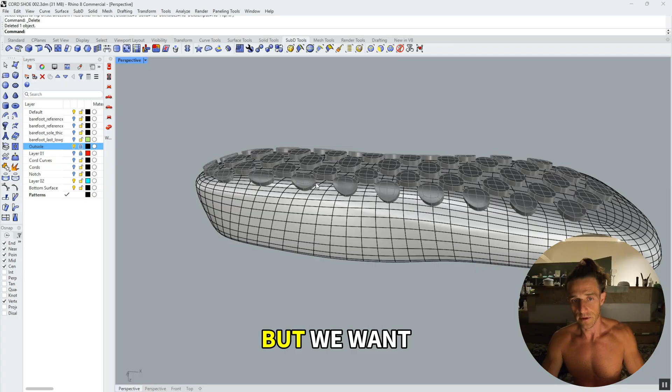Okay, as you see, the edges are very sharp, and that's what we don't want, but we want the edges on the inside to be sharp.

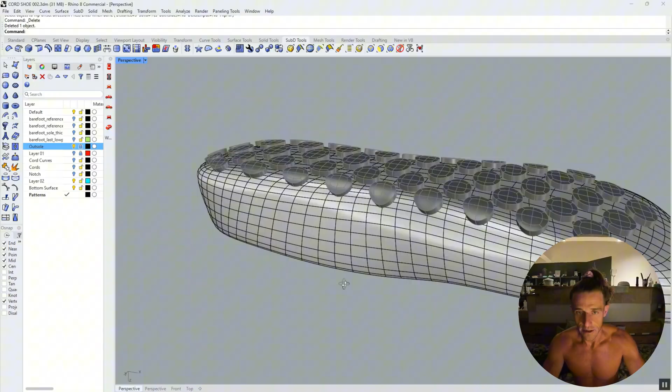Now, another thing to keep in mind is if you do it this way, you create undercuts, which doesn't matter for this, but if this shoe was injection molded, that would be a problem. You want to always keep options for injection molding, because if your shoe blows up, you might want to injection mold it down the road, since it's so much cheaper and the profit margin is higher, and you've already made sales to have money to open tooling from 3D printing. Sometimes injection molding makes more sense, but if that's going to cause child labor, or you have to go check the factory, then forget about injection molding—we don't want that to happen.

Okay, so these guys, let's see—if we hold this down and move up like that, control down, then this is going like this. So how high did I move it up? Don't really know, because it's all visual, but I can tell what's going to be good from experience. So I'm just moving this, holding down control.

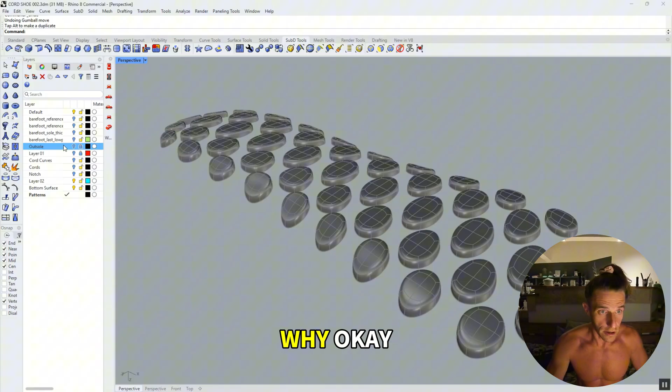Okay, so let's see. Now these ones are open from this side, but that doesn't matter to us right now, I'll show you why. But first we want to make sure they all intersect, so we're going to move them into the geometry so they definitely all intersect. You see how they're all going in like that? Okay, so that's what we want. Let me do a save here at this point.

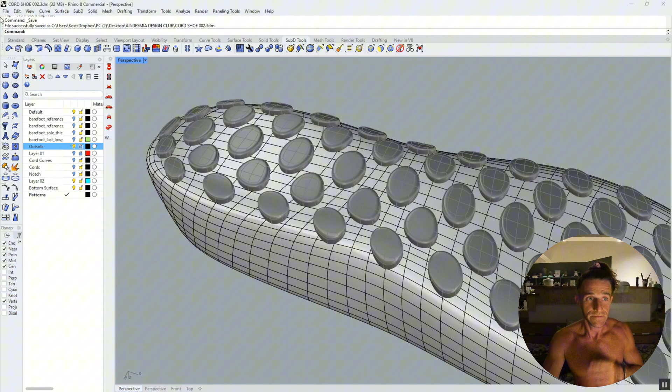So now we have this outsole like this. Let's do a render view so we can see what's going on. So this is what it looks like right now—okay, that's pretty good.

So, in order for this to be ready to go, printable and all that stuff—now, I saved it here, let me save an incremental, so I have this and another file. You start making a million layers here.

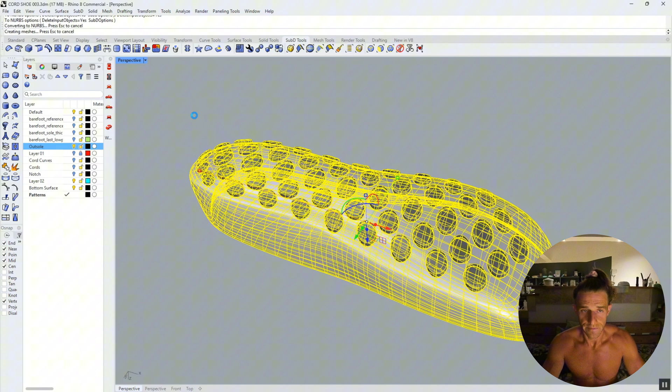Okay, so let's make this one piece. So I'm gonna select this—select this actually—and convert all of this to NURBS. Okay, now it's all NURBS. Look at that disgusting cut—doesn't matter. Now that it's all NURBS, you can select the whole thing and say Boolean union.

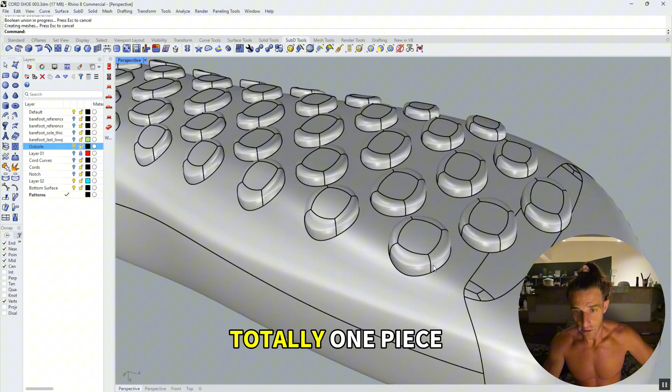It's going to be one piece. Okay, now it's totally one piece, see? And then you can check—it's called show edges—make sure there's no naked edges. No naked edges, no non-manifold. This is going to be printed, no problem.

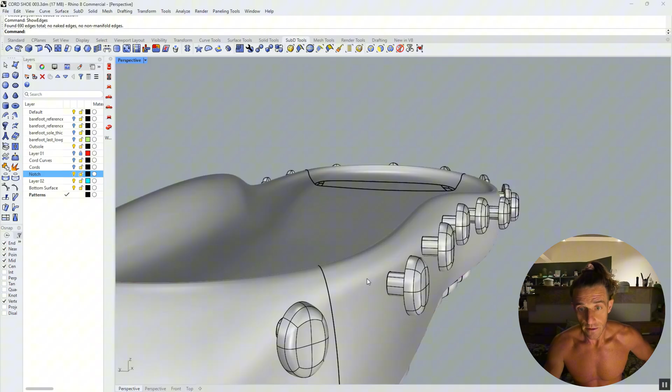Alright, and then we have our notches. And our notches now are not going in all of them all the way.

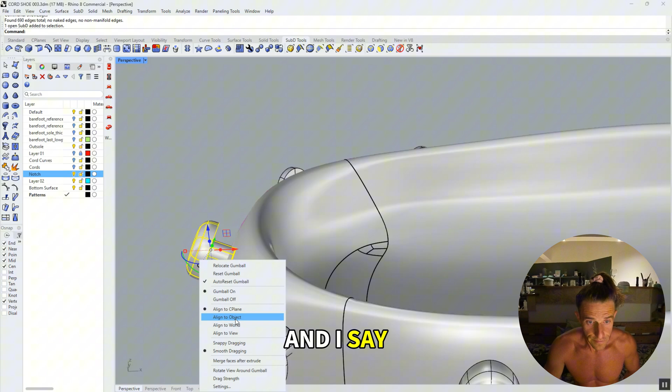So we want to make sure that these guys... let's see if I click this white one and say align to object. See, this is supposed to align to object, but I don't know why it doesn't align. But you know me by now, I don't dilly-dally too long trying to figure out why things don't work.

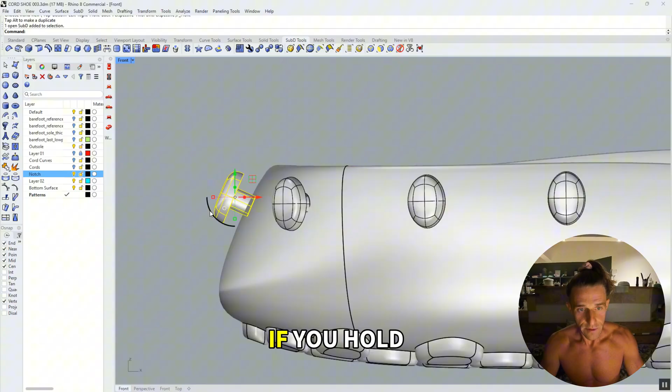I just do the next best thing. So you hold shift - oh yeah, you hold shift, that's right. If you hold shift, the Gumball moves like that. So all I did is align the Gumball. Actually, I did push this one in, so this is fine.

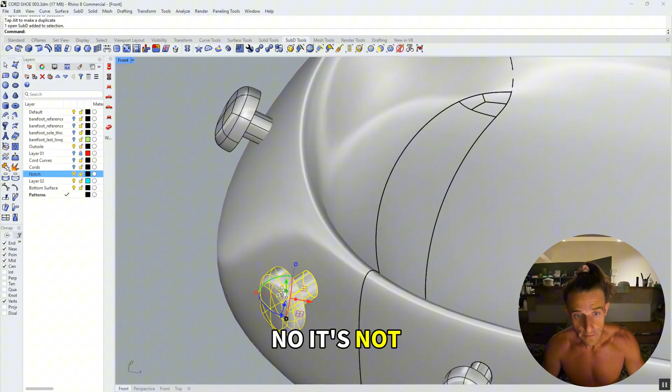And these other ones, so this guy, let me see. That's pretty much aligned in this direction, but it's not aligned in this direction. So is it? No, it's not. Okay, so first of all, I'm going to view this from the top. Okay, so you see how this is not aligned? Like what I mean?

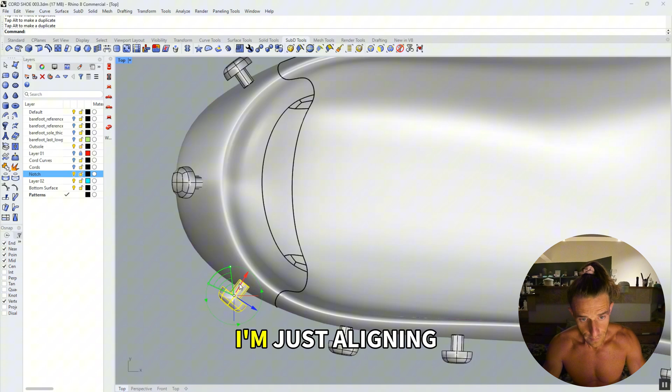Stop it. Okay. I'm just aligning this in there, and it's still annoying that the object is also moving.

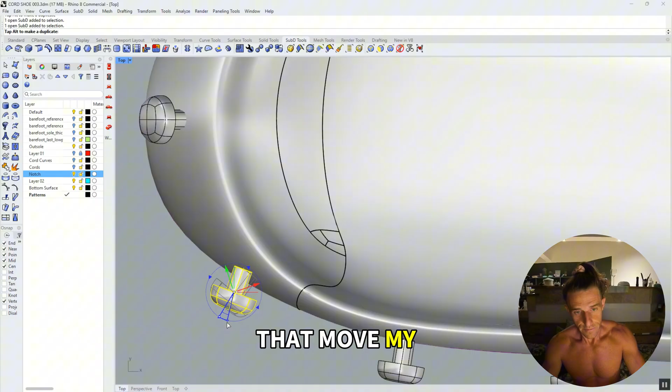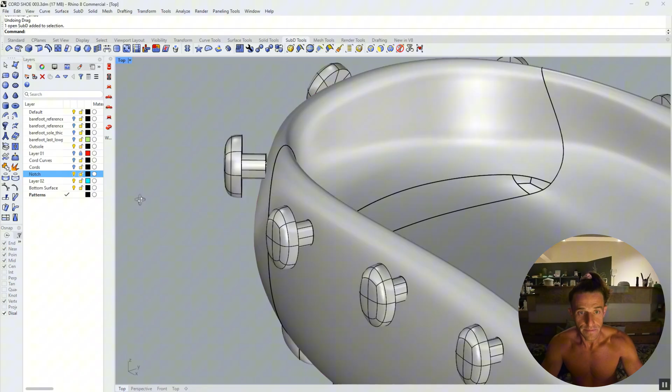Just trying to move this. Alright, let me undo, or let me make sure that it doesn't snap to anything, because that's - or you know what? My only problem here is that this

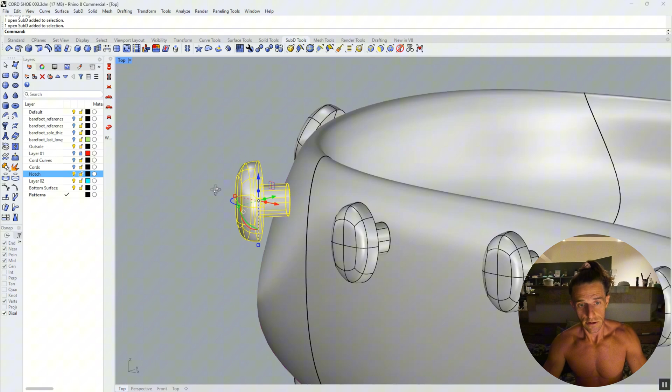is not aligning to the surface really nicely. So I want to make sure that it aligns okay to the surface. Most of them are already, so it's just one, or it's just these two. So let's just manually fix these two.

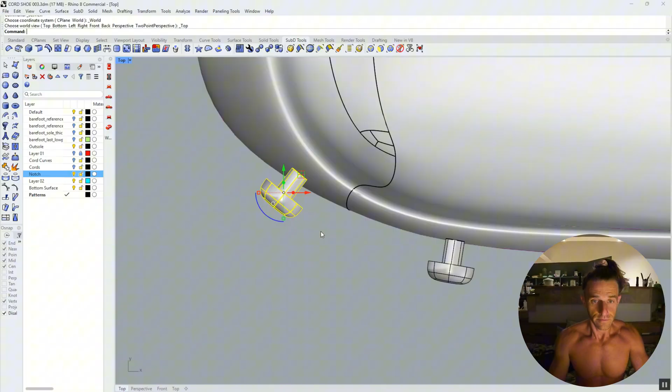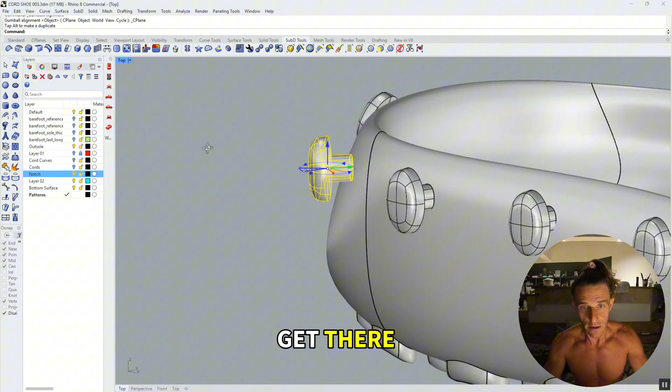So back to top view. I'm holding control. Okay. It's so annoying, let me see this. Let me just CPlane. Okay, now that we get there, it just doesn't stay there.

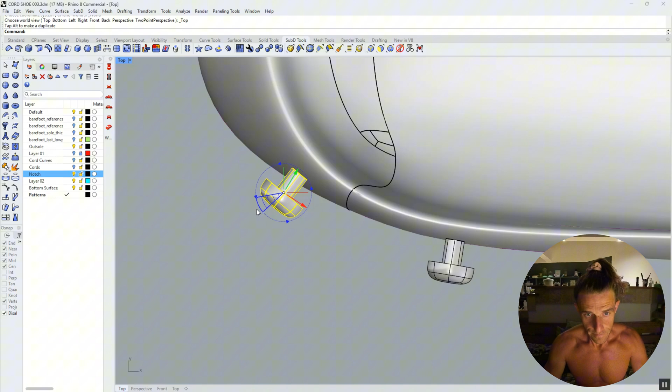Align to view. Okay, top. Okay, well first let's do one thing at a time. Stop it. Align to view, and then - oh wow, this is not working right now. What's the point of Gumball?

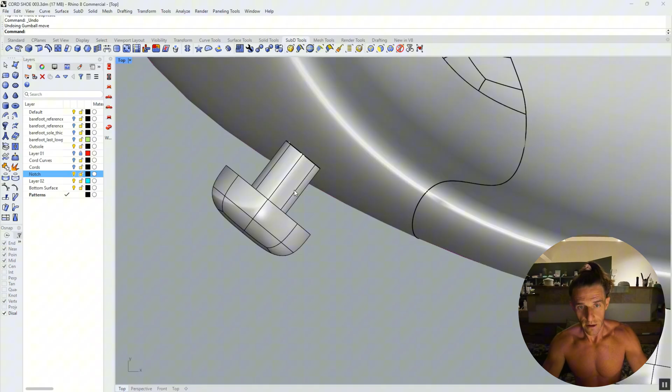Okay, let's just do it visually. Move. All we're trying to do is go in here. Okay. And then make sure this guy is going in there. Okay.

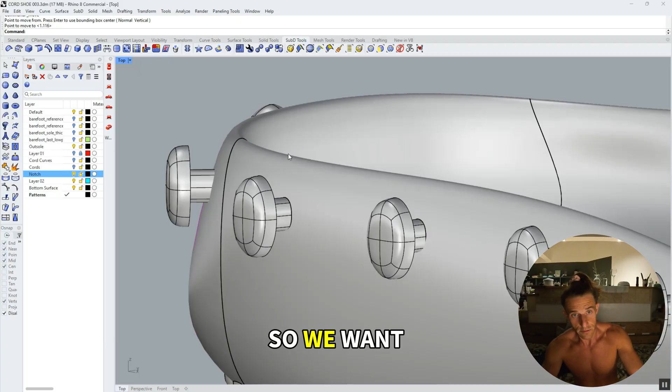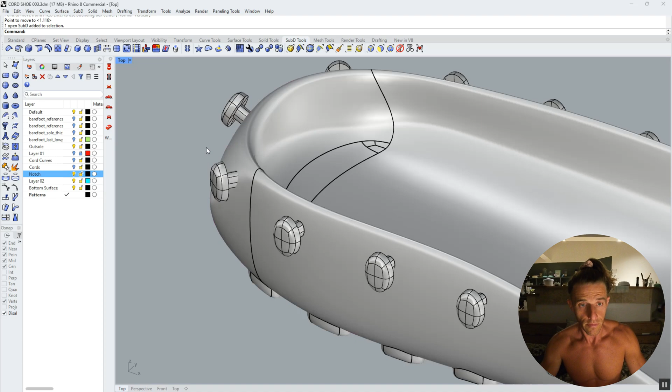But you see how this is very open here, so we want to rotate in like that. But that Gumball isn't aligning nicely, so we can go in there. But we did align to view, so we can move this so it's like really good, like this.

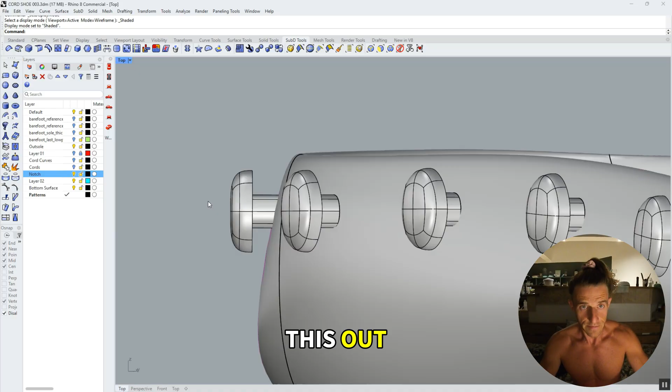And then, oh, we can check this out. Let's go to an ortho. We are in an orthographic actually. Okay, so we are in an orthographic view. So because it's aligned to view, I'm going to type rotate.

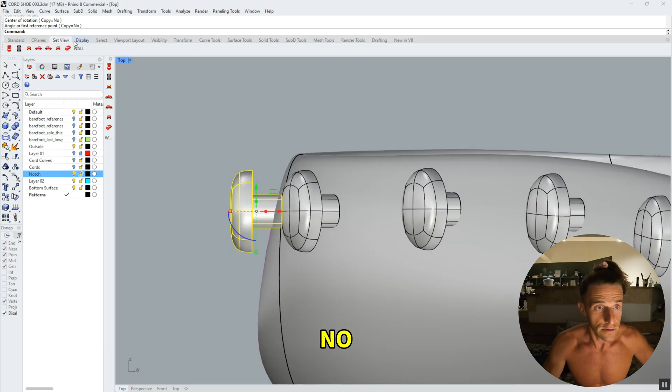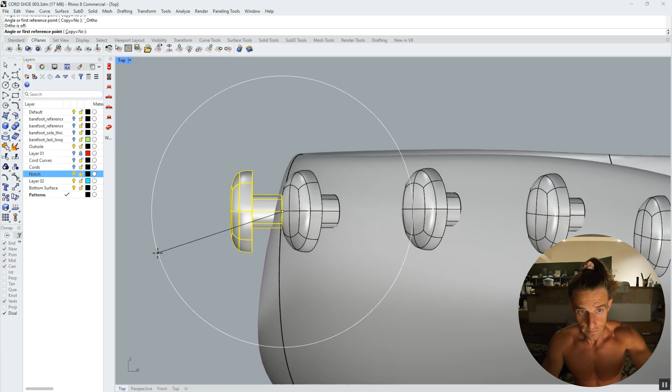Okay, see that? That's what I'm talking about. I want this to align to the surface. And then we have one more problematic - this one here. So we want to make sure that's nice to view. Okay, it's good enough.

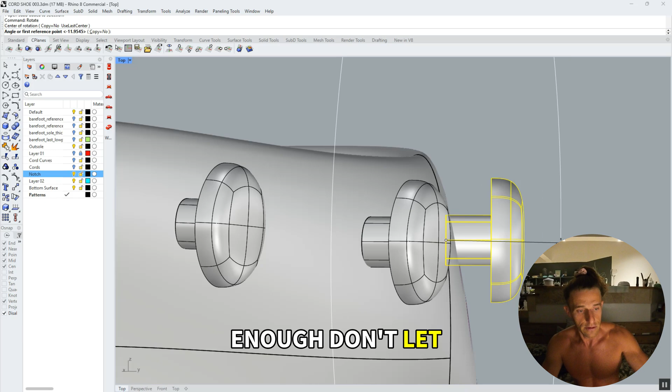As one guy used to tell me, don't let perfection get in the way of good enough. Yeah, like things don't have to be ultra perfect because it's too small to matter. Okay.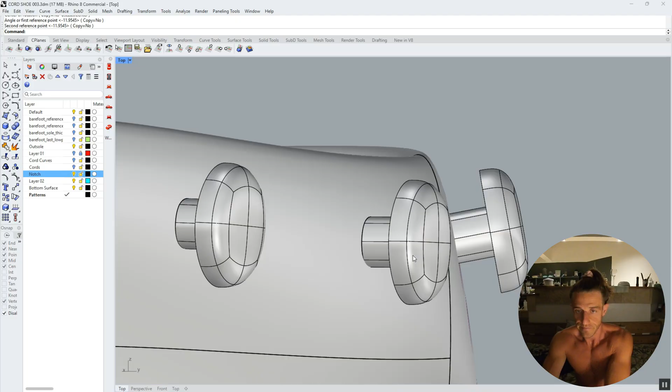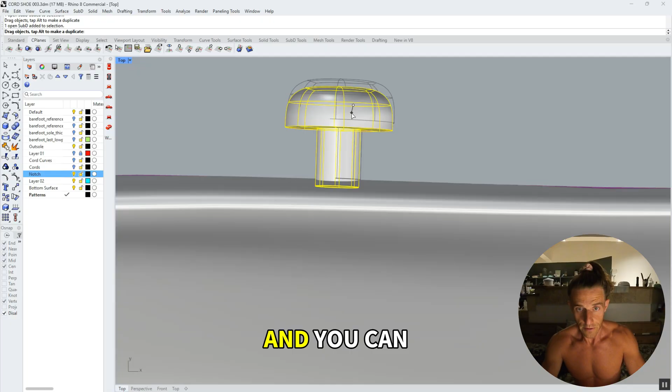So that's going in. Okay. Now we go to top view and we move everything in a little bit. And you can see where it was, so from where it was to where you want to go. So yeah, you move it a little smidge in one direction, doesn't matter.

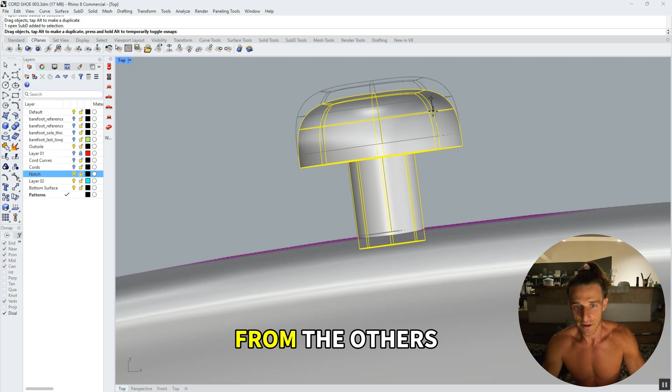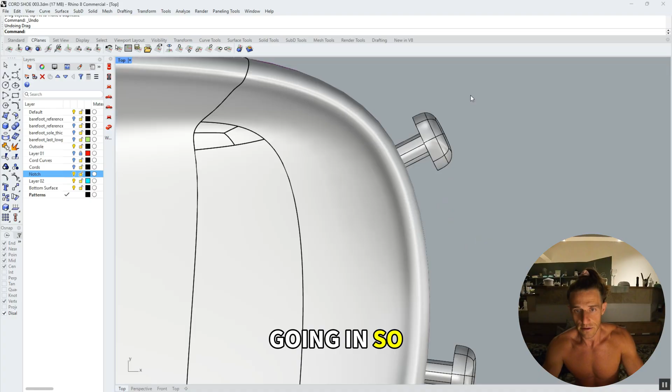Again, if some of these are, you know, one-tenth of a millimeter different from the others in and out, nobody cares, okay, it doesn't matter. Now this would never be injection molded because it makes too many undercuts, so we have to figure something else out. This is already going in, so that's okay. This is already going in as well. This guy's not going in, so let's just go in a little more.

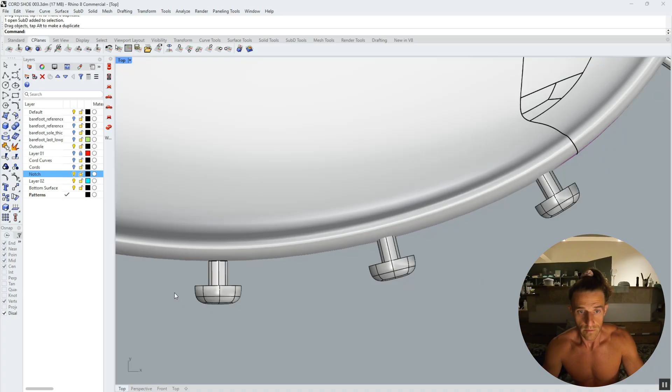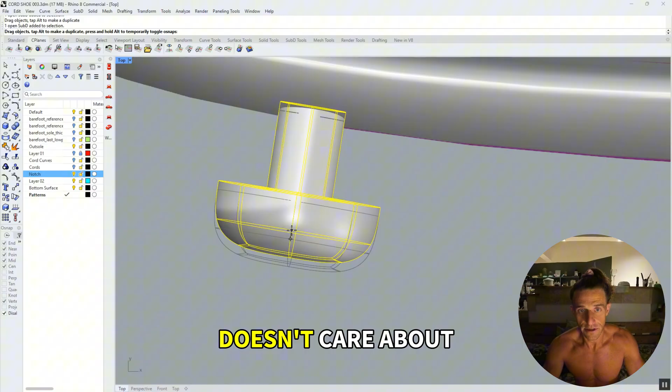Can you make all of this perfect and mathematical? Yes, you can. But would that take hours and hours of trial and error to set up? Yes, it will. So that's why I don't bother doing things that way, because the customer doesn't care about that. You're not going to win a prize, and usually unless the prize is more money, forget it.

Okay, so these guys we can select, even though they're NURBS. They're not NURBS, they are sub-Ds. The command Boolean all is going to turn it into NURBS. So just Boolean union.

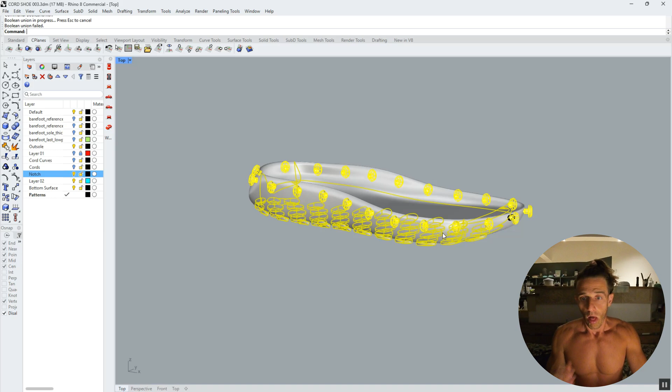Did it turn it? It didn't turn it, and it's telling you why. Look at how beautiful it is. This guy is not sinking in there. Well, some of these guys are not there yet.

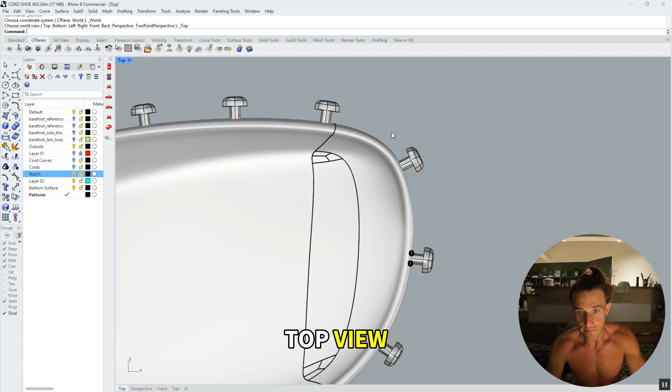So let's just go to top view again, and then push this in. Because from the view, let's push them all in, the ones we didn't push, because from this view you can tell they weren't in.

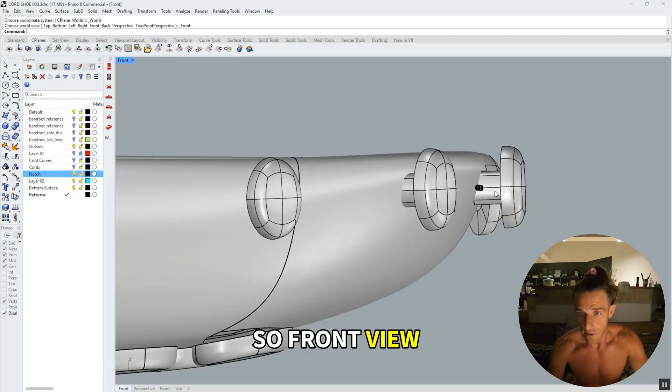Still not in, because the bend here is too much. So, front view, push this guy in, and then this guy is one of those that needs a little bit of rotation. Like that.

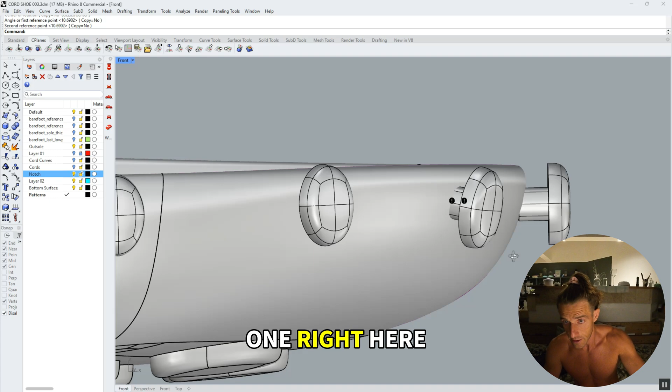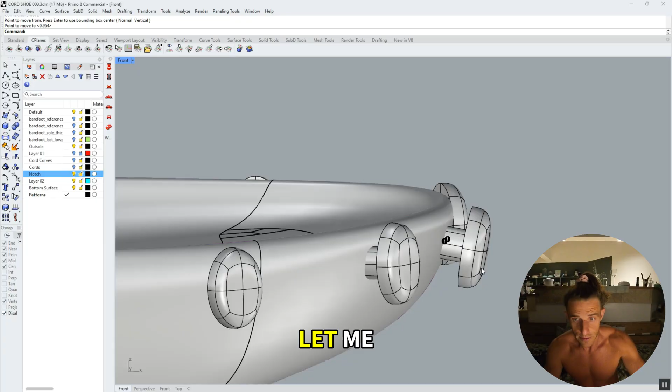These other ones probably, oh, you see this one right here? It's not going in, right? Okay, now they're all going in. But we don't just want to be weird, so let me undo that. Okay.

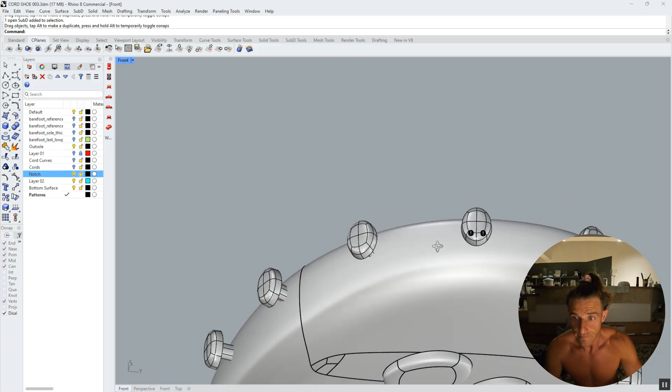Okay, just select all, Boolean union. Okay, so it's all one. Show edges: no naked, no non-manifold.

Now, if you really are anal about it, you can fillet this, fillet edge. I double clicked it and do this. It's actually good because it makes the connection stronger, so it's good to do that.

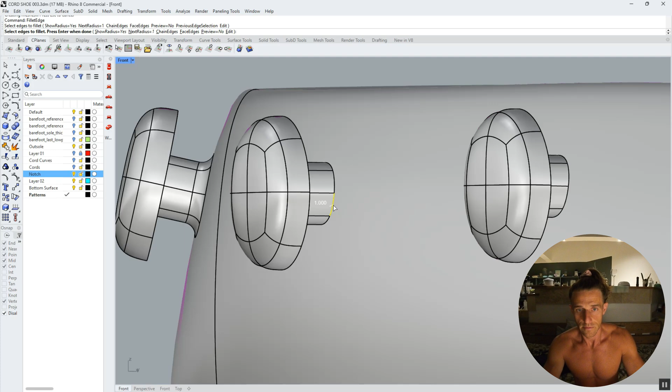And you can even do this all at once, but I'm doing it one by one because sometimes they fail, and if you don't check, you have to check them. Might as well do it one by one.

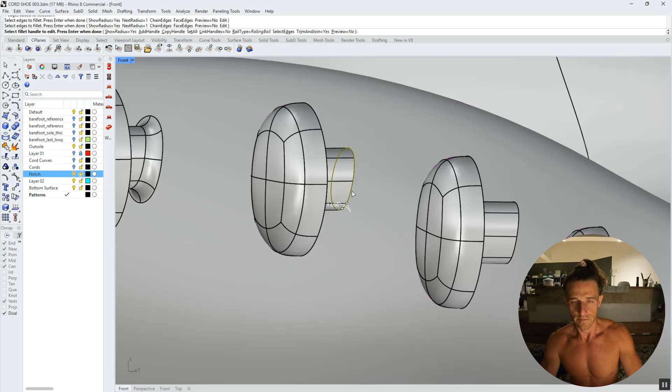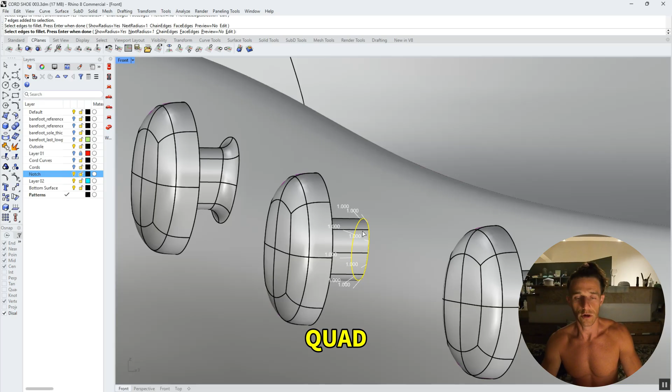And Rhino is really fast. With the repeat last command, you just hit spacebar, and you double click to do the chain edges. What I mean by chain edges is when you click one, it does just a little edge, but if you double click, it does the loop, or triple or quadruple clicks to do the whole loop, just keep clicking.

Excuse me, got this cold. It's gonna take forever to go away. The thing that's left is the cough.

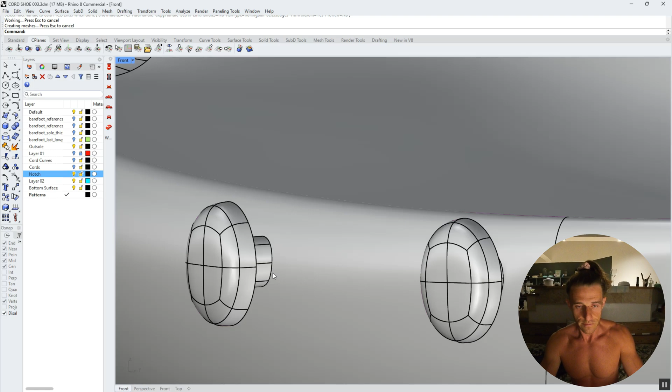Okay, so yeah, I'm gonna do that and round all these things, and then we are totally ready with this file once that's done. And we can then next, let me see how much time is left.

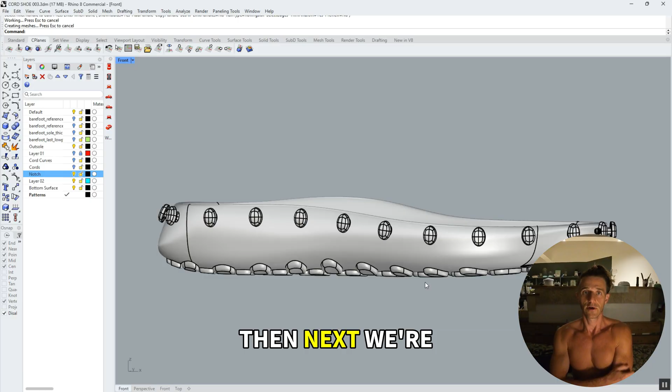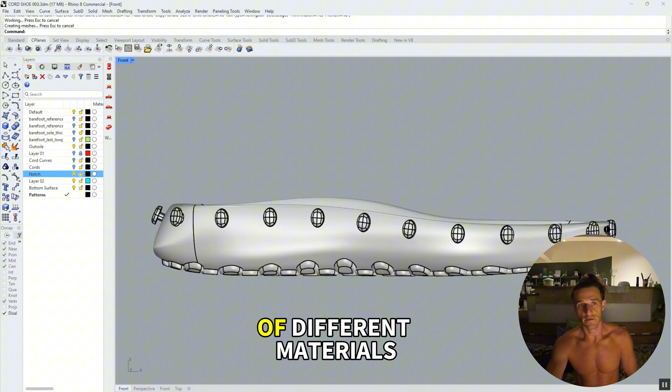Okay, next we're just gonna do the visualization of what this will look like with the cording, but this is the only piece that we're printing. The rest of it is either cording, leather straps, an upper made out of different materials that you get on a roll or sheets, so you can make any shoe you want.

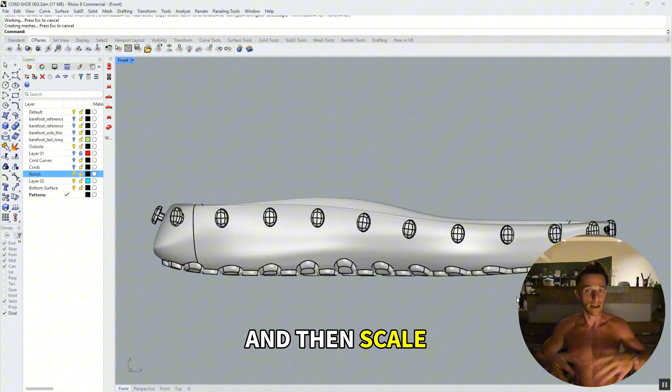Because remember, the whole point of this is so that you can start a business from your basement or anywhere you are with the smallest amount of money possible, and then scale it up, and when things take off and you have some money, then you can go to a factory.

And if you need help with that, I can help you because I have street cred with a lot of factories, just because I brought a lot of clients to work with these factories, so they give me lines of credit, unlike other people who get lines of credit where they'll actually ask you for 100,000. I don't need to do that because I've moved a lot of money to these factories.

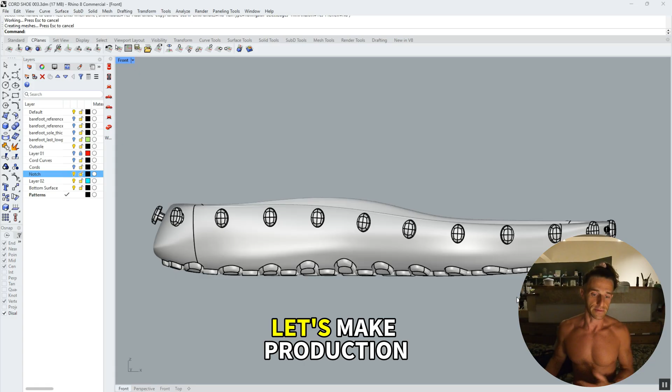They'll give me two months runway to make production, but we have to pay them, and I would actually collect as insurance, because sometimes people don't pay, and I don't want to chase people around for money. That's the most annoying part about large businesses, they take forever to pay. I don't know why, when they have the money, it's the easiest thing you can do, just pay. It doesn't get easier than that. But anyways, we'll talk about that when we get there.

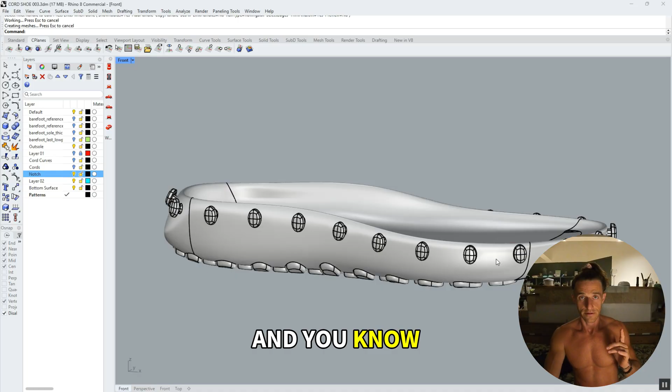For now, we're right here, and you can get this file as it is, ready to go, ready to print. It's not ready for injection molding, but I will make that file available, like every file available, to all those who join the Designated Design Club.